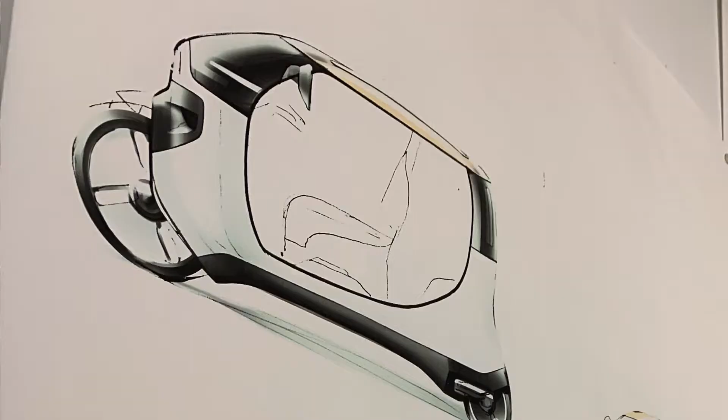I've been thinking about creating something that's much more energy efficient than a traditional car. Over some trips in Asia, I realized that three-wheelers are an extremely important part of solving urban mobility requirements. Over two decades, this idea has evolved. From the beginning, our thinking was, is the car really the perfect solution for everything regarding transportation? We thought, no, it's not. We need to find something for transport within cities that's really sustainable.

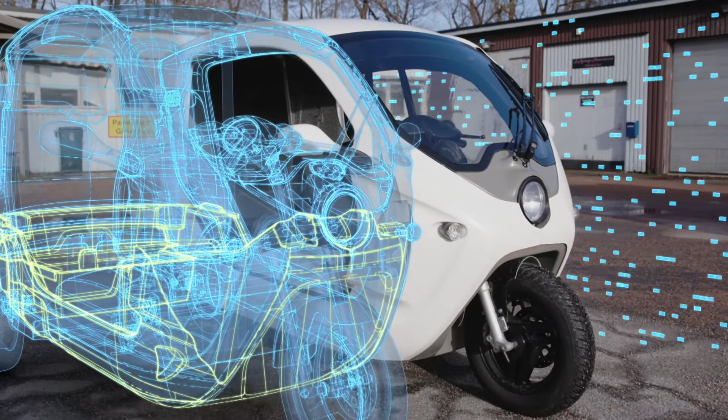So really thinking small would be good, lightweight, but it's not just a vehicle. How can we integrate this? So we added connectivity to it. This piece is actually part of fleets that will cover these transportation needs that we see.

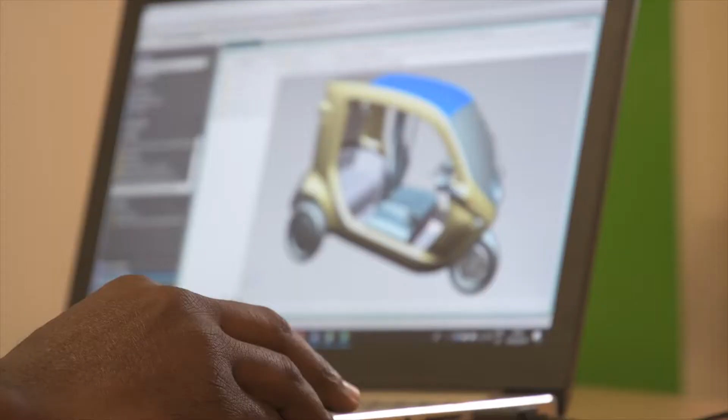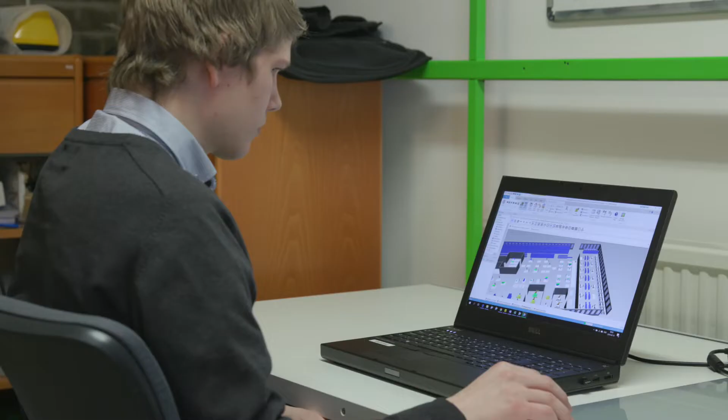From birth, we have been fully digital, and that has been the core. We could never have achieved this working in the traditional way. We had a lot of ideas where we wanted to reach, so we were really looking for strong partners and focusing on how to make a more efficient product development, and we need to be digital in the manufacturing area as well. But we have more areas where we would like to digitize.

We felt we need to do it with the utilization. When our products are out in the field running, we want to collect all of that data, feed it back to our digital backbone, do optimization, and see things before they happen.

So we started to see, okay, what kind of solution exists? And we saw Siemens. So then we thought, this is interesting. And of course, Siemens has great products, but it was really the people that made a difference.

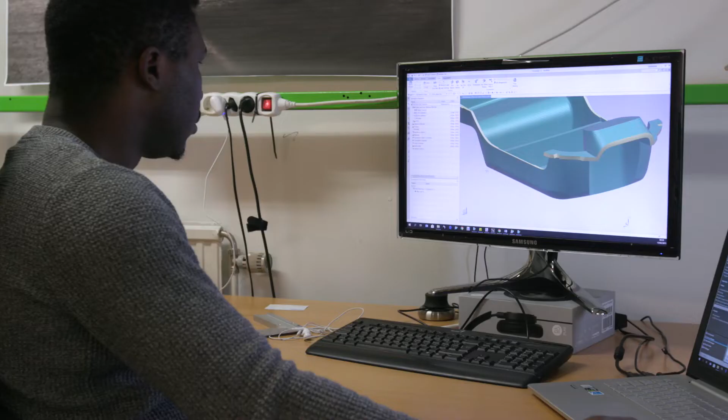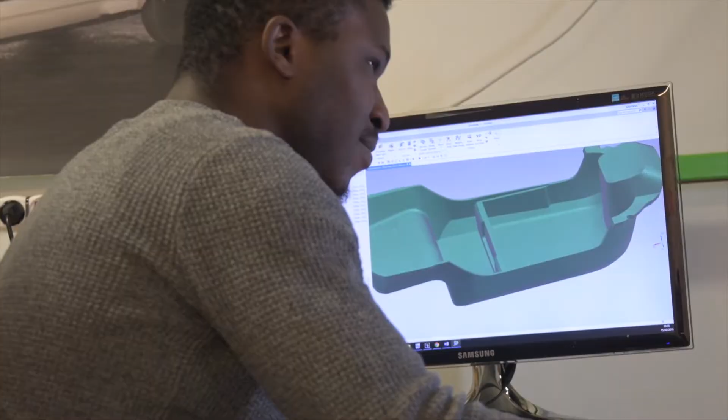The biggest advantage is there's a seamless connection from your first design in NX to getting and storing back your data in Teamcenter and doing your analysis in Simcenter. It looks like one software. You change things directly in your simulation software in Simcenter 3D, and yet you're working with your NX model. You don't have the human interference of moving things around or having to convert from one format to another, and then lose data intelligence.

If you do the design in the right context from the beginning, you do it right rather than doing it wrong, which is even more important.

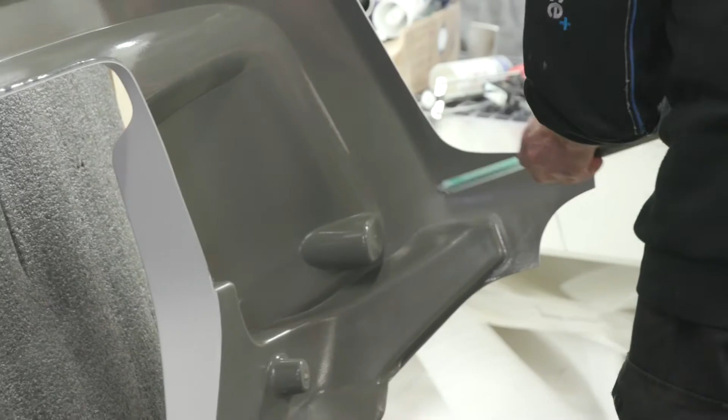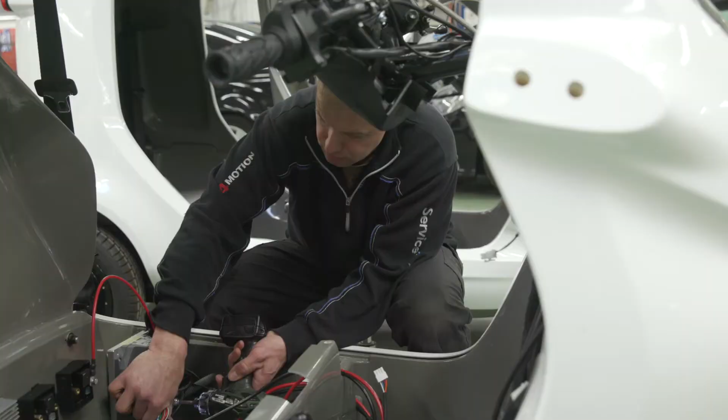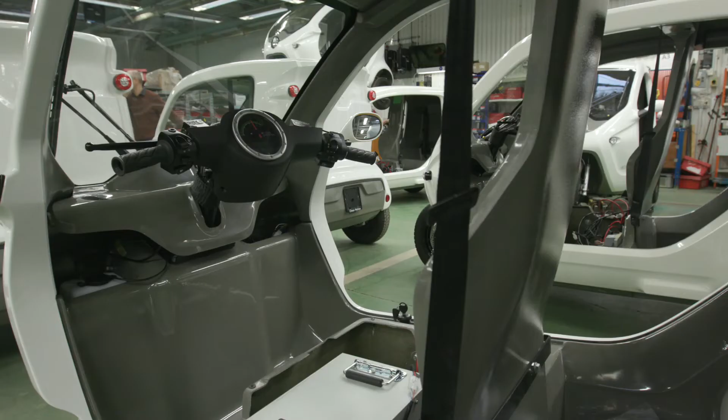By using composite technology, we can change so much of the business model because the investments required to set up manufacturing are much lower, which means that very early on we looked at the concept of creating micro factories. If we have a product that has only 270 parts in total, you could have a very resource-efficient production facility. And if the vehicle is an out-of-the-box solution, why couldn't the factory be that as well? And if that factory is grounded on the same philosophy as our vehicle, we could just as much sell these factories.

We are only at the beginning of our journey. Now begins an equally exciting phase. In the past, we have focused on creating the product, verifying the product.

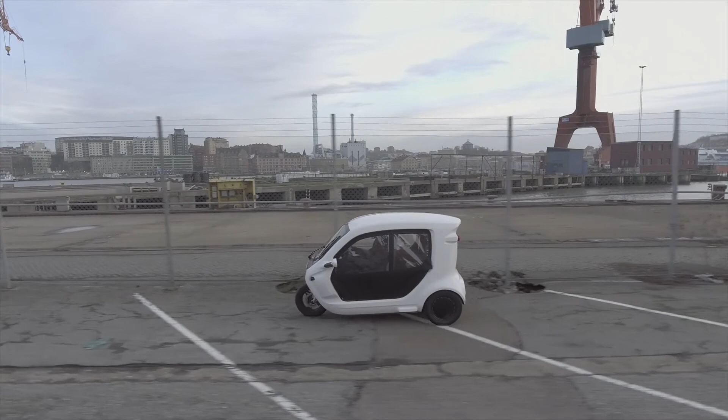Now we have vehicles in small numbers still, but in many parts of the world. And we do see it as a global vehicle. It can work on the streets in Stockholm as well as in Delhi, especially given the increasing problems in mega cities with huge pollution issues. Also from that perspective, the aspect of providing real clean, no emission transportation in these metropolitan cities is a great relief.